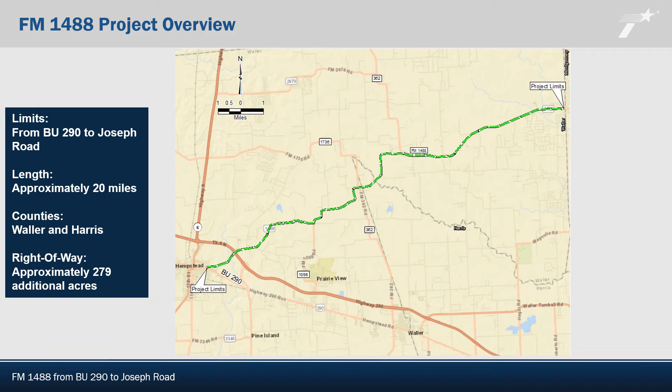The project's limits are from Business 290 in Hempstead to Joseph Road in Waller and Harris counties. Land use in the area is typically agricultural with businesses and residences scattered throughout. From Business 290 to US 290, the land use is more urban and developed with businesses and residences.

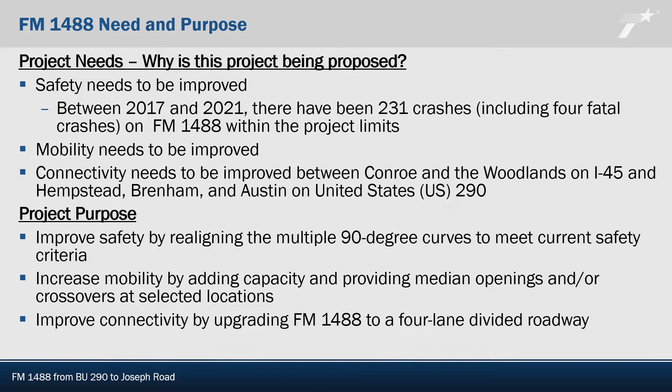The project is being proposed to address safety, mobility, and connectivity. The purpose of the proposed project is to improve safety by realigning the multiple 90-degree curves to meet current safety criteria, increase mobility by adding capacity and providing median openings at selected locations, and improve connectivity by upgrading FM 1488 to a 4-lane divided roadway.

One of the goals for the project is to reduce crashes along the corridor. The project team analyzed crash data for the project corridor for the years 2017 through 2021. Over this 5-year period, there have been 231 crashes, including 4 fatal crashes on FM 1488 within the project limits.

Of the 231 crashes, 76 may have been injury crashes. Additionally, at least 50 of these crashes occurred on sections of FM 1488 that have sharp 90-degree curves, which makes up 22% of the crashes over the 5-year study period.

Also shown on this graph is the statewide average crash rate. In 2021, the statewide average crash rate per 100 million vehicle miles traveled was 115.91, represented by the black line. The orange bars represent the FM 1488 crash rate calculated between the roadways listed above. As you can see, the crash rate along the FM 1488 corridor within the project limits varies from 129 to 237 crashes per 100 million vehicle miles traveled. This results in an average crash rate of 184 crashes per 100 million vehicle miles traveled along the corridor, which is 59% higher than the statewide average for similar roadways.

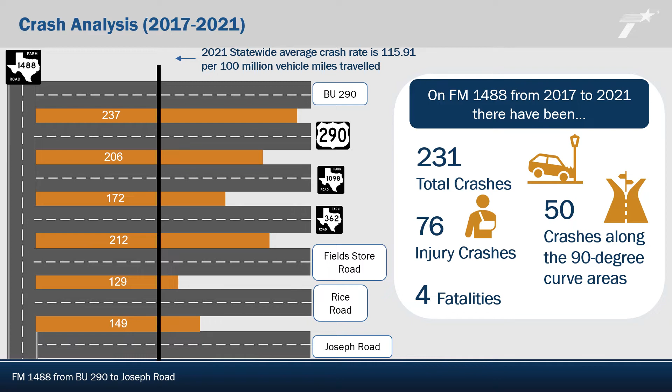Mobility along FM 1488 is reduced due to numerous intersecting roadways and driveways to adjacent properties. Upgrading FM 1488 to a 4-lane divided roadway would add capacity and better accommodate turning vehicles. Median openings at selected locations, and in some areas a center-left turn lane, would be provided to accommodate residents, businesses, and intersecting roads. These would allow east-west traffic to continue driving without having to stop for turning vehicles. The roadway would be designed according to current TxDOT design standards.

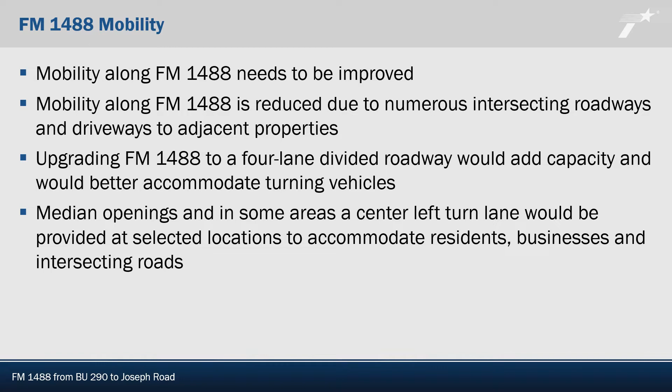Connectivity along FM 1488 needs to be improved. According to the 2017 Waller County Comprehensive Strategic Plan, FM 1488 is one of the top 3 most traveled FM roads, providing a major east-west connection. The proposed project limits are the last remaining segment of FM 1488 to be widened to a 4-lane divided roadway. From I-45 to Spur 149, FM 1488 is a 4-lane divided roadway. From Spur 149 to FM 149, FM 1488 is under construction for widening to a 4-lane divided roadway. From FM 149 to Joseph Road, FM 1488 has been environmentally cleared for widening to a 4-lane divided roadway.

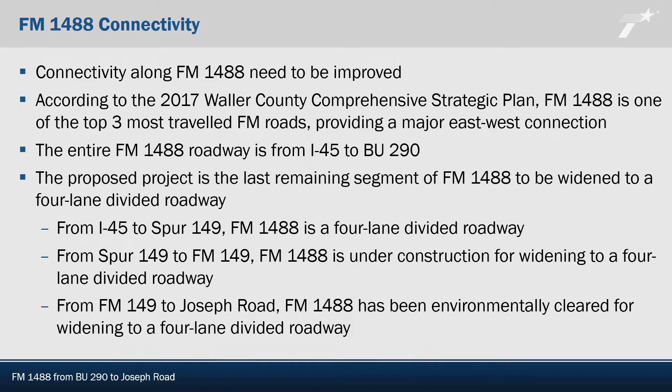This is the second public meeting regarding the proposed widening of FM 1488 between Business 290 and Joseph Road. At the first public meeting in March 2020, 3 general alternatives to widen the roadway and a total of 9 alternatives in the 90-degree curve areas were presented. Following the meeting, the project team refined the alternatives to generate a preferred alternative based on public comment, geometric refinement, safety considerations, and reduction of impacts. The preferred alternative is what is being shown at this public meeting.

Some examples of the alternative refinement can be seen when looking at the curve areas. The preferred alternative in the curve areas is different than what was shown previously, unlike other areas of the corridor where the preferred alternative comes from one of the alternatives presented at the first public meeting. The following 4 slides show examples of the differences between the alternatives shown at the first public meeting and the preferred alternative.

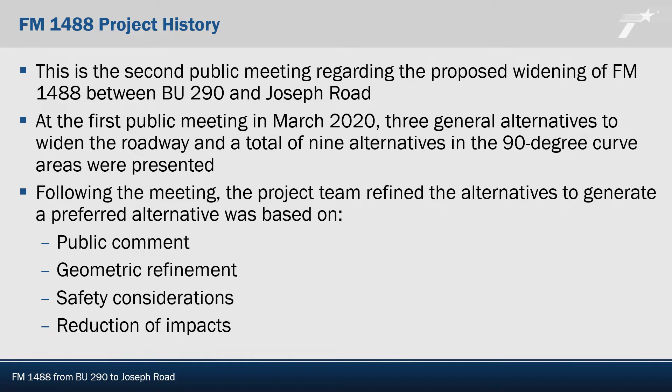The locations of the 3 areas with 90-degree curves along existing FM 1488 can be seen on the map. As discussed on the previous slides, at least 22% of the crashes that occurred along FM 1488 within the project limits occurred on these curves. The project proposes to soften the curves to reduce crashes. The preferred alternative for each of the 90-degree curve areas, as well as the alternative shown at the first public meeting, can be seen in more detail on the following 3 slides.

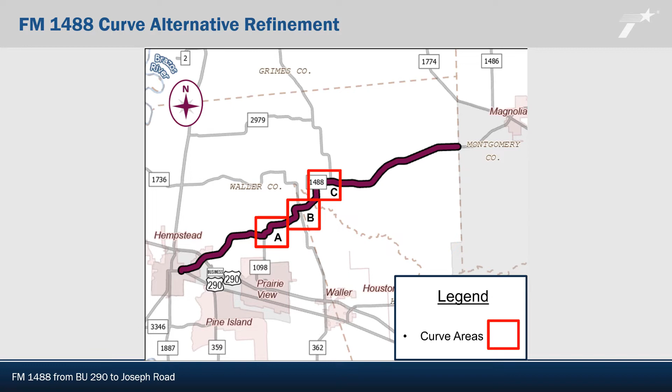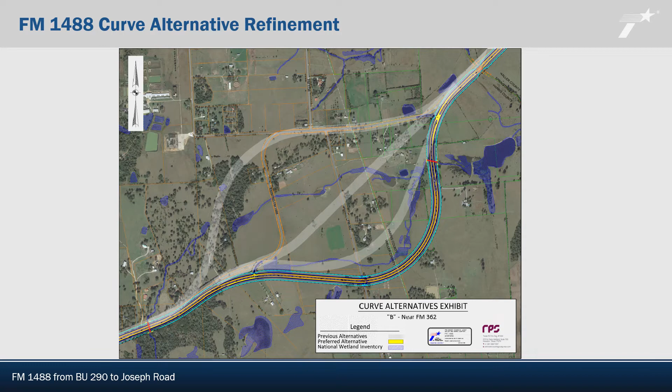This image shows curve area C, located west of Field Store near Field Store Elementary School. As with the previous slide, the gray shaded areas represent alternatives shown at the last public meeting, and the blue outline path highlights the preferred alignment. The preferred alternative does not follow the alternative alignments shown in March of 2020 because in this area, the curve could be smoothed out by making geometric improvements to meet the design requirements, resulting in fewer impacts to property owners.

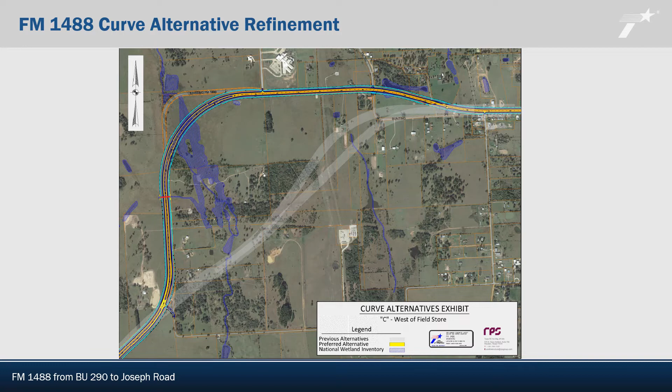In addition to softening the curves, this project proposes to reconstruct and widen the existing 2-lane undivided roadway to a 4-lane divided roadway with median openings at various locations. There are 2 sections of FM 1488 proposed to be reconstructed as a 4-lane roadway divided by a center left turn lane. This configuration is proposed from west of Giboney Road to east of Hegar Road, and from west of Woodway Drive to Joseph Road.

Improvements also include constructing a 10-foot wide side path that accommodates pedestrians and bicyclists between Business 290 and US 290, and constructing a 5-foot wide sidewalk between US 290 and Joseph Road.

The no-build alternative would also be considered. This would mean that no roadway widening would occur and only planned roadway maintenance would take place.

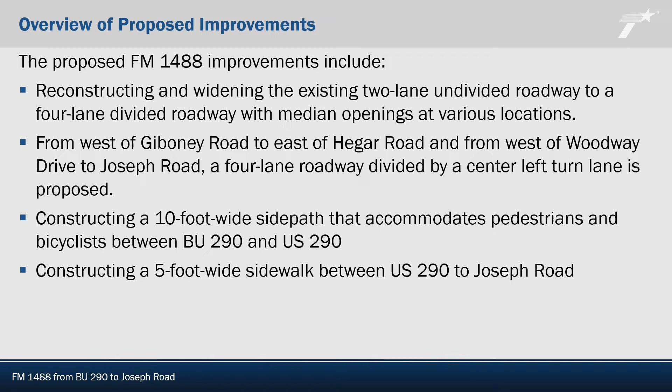Following the first public meeting, a single alternative was not selected. Rather, the preferred alternative for the widening of FM 1488 is the result of a closer investigation of the previous alternatives and a refinement to address public comments on alignment location, improve geometrics and safety, avoid low-lying areas with drainage concerns, and reduce impacts. One example of the alternative refinement was the development of sections where a center left turn lane is proposed.

During the first public meeting, 2 alternative evaluation matrices were shared. One matrix focused on comparing the general widening alternatives: Alternative A, which required right-of-way from the left side of FM 1488; Alternative B, which required right-of-way from both sides; and Alternative C, which required right-of-way from the right side of FM 1488.

The second evaluation matrix focused on evaluating the same criteria but only for the 9 curve alternatives.

The evaluation matrix shown here evaluates the preferred alternative, excluding the curve areas, compared to the general widening alternatives shown at the first public meeting. Although the estimated right-of-way is higher for the general widening of FM 1488, the number of residential, commercial, and other displacements with this alternative is lower than the previously shown alternatives.

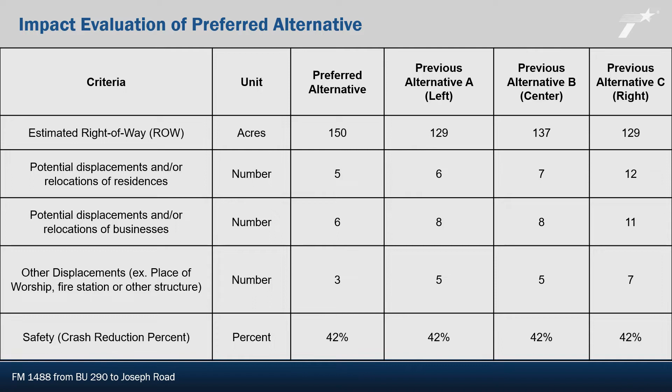In March of 2020, the evaluation matrix comparing the curve areas was separated out in order to provide details for each alternative. The evaluation matrix shown here evaluates the preferred alternative in the curve areas compared to a range of impacts associated with the 9 different curve alternatives.

Typically, each alternative had an estimated right-of-way between 34 and 46 acres. The estimated right-of-way for each curve area is similar to what was estimated for each curve alternative shown previously. However, with the preferred alternative, there are no anticipated residential or commercial displacements and only one potential other displacement.

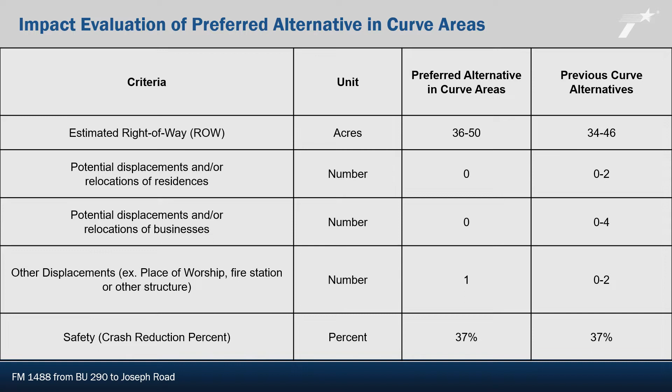This slide shows an existing typical section. A typical section is intended to show a cross-section of the road to illustrate what it looks like at a specific location. As you can see here, FM 1488 currently has one 12-foot wide lane in each direction with an intermittent 12-foot wide center left turn lane.

Shoulder width varies from 4 to 10 feet wide. The existing right-of-way varies from 80 to 100 feet wide.

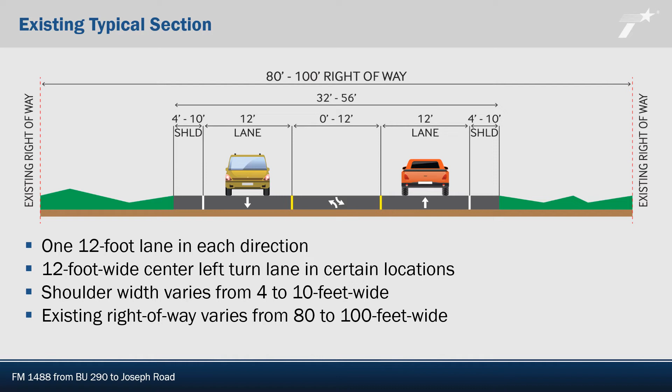Shown here is a typical section illustrating what FM 1488 between Business 290 and US 290 would look like post-construction. The project proposes to add one additional lane in each direction and construct an 18-foot wide raised median. Left turn bays are proposed at certain locations along the corridor, which can be seen on the schematic.

A 10-foot wide side path is proposed for 2-way bicycle and pedestrian use on both sides of FM 1488, separated from traffic by a buffer. The proposed right-of-way would be approximately 120 feet wide.

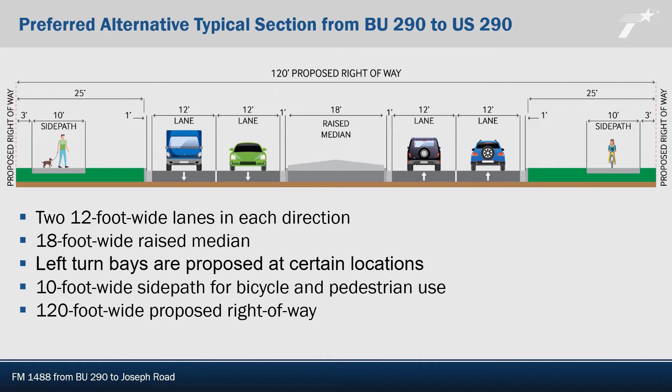This slide illustrates what FM 1488 from US 290 to Joseph Road would look like post-construction. The proposed improvements include adding one additional lane in each direction and constructing a 40-foot depressed grassy median.

A 5-foot wide sidewalk is proposed on each side of FM 1488 for pedestrian use, separated from traffic by a buffer. The 10-foot wide outside shoulders would accommodate bicycles. The proposed right-of-way would vary between 200 and 220 feet wide.

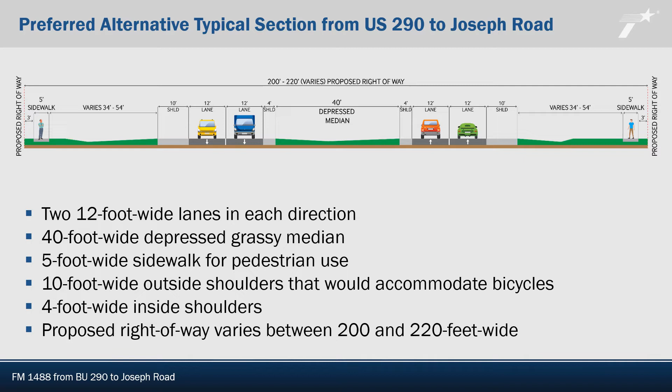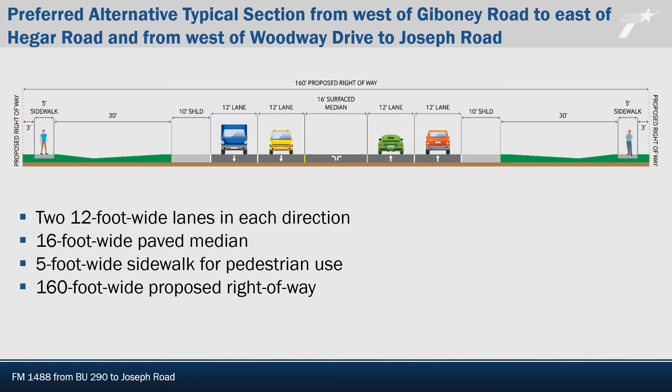Their contact information is given later in the presentation.

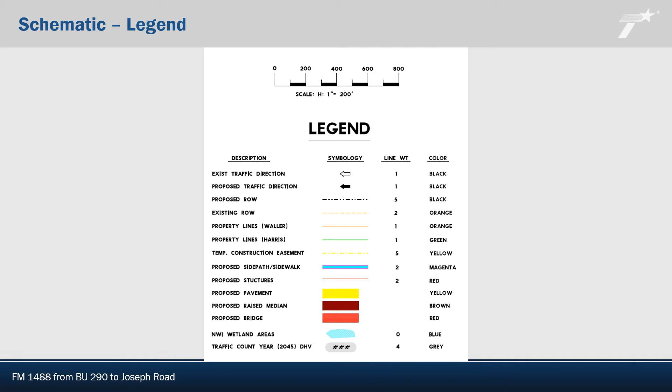Approximately 279 acres of additional right-of-way would be required for the proposed project and would potentially displace 5 residential structures, 6 commercial structures, and 4 structures classified as other.

A structure classified as other is a structure that is a different type than a residential or commercial structure. For this project, the other potential displacements were identified as 3 sheds associated with residential properties and a utility building.

TxDOT offers relocation counseling and financial assistance to residences and businesses that are displaced by the acquisition of highway right-of-way in accordance with the Uniform Relocation Assistance and Real Property Acquisition Policies Act of 1970.

TxDOT would provide assistance to potentially displaced residences and businesses. Information about the TxDOT Relocation Assistance Program concerning services and benefits for displaced persons and businesses can be found on the TxDOT website.

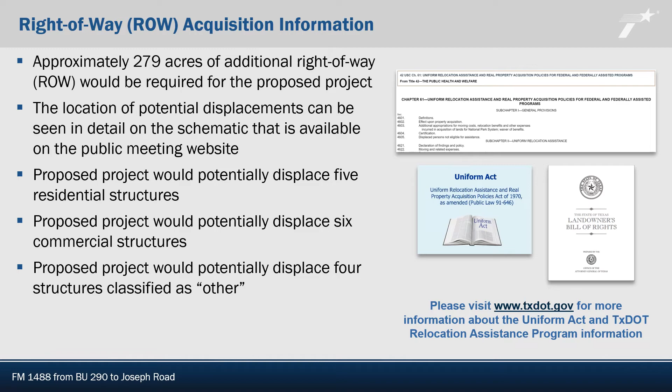Over the next few slides, I will walk through the location of each potential displacement. Feel free to pause the video to study in more detail, or visit the schematic exhibit either online or in person.

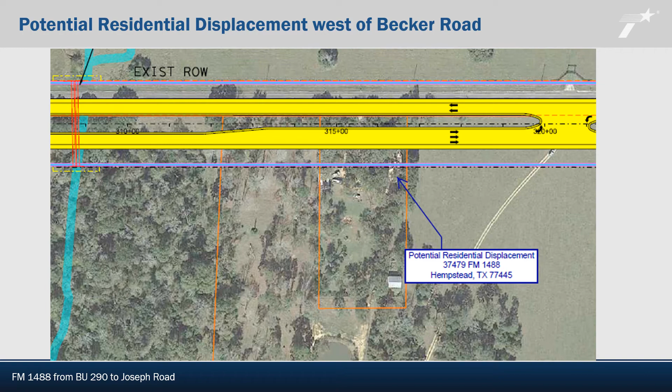A potential residential displacement was identified west of Becker Road, located at 37479 FM 1488, Hempstead, Texas 77445.

A potential other displacement was identified as a shed located west of FM 362 at 34855 FM 1488, Hempstead, Texas 77445.

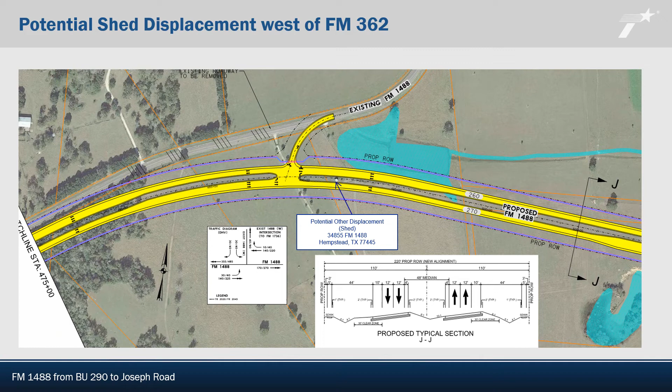2 potential commercial displacements and a potential residential displacement were identified near Fields Store Road. Amsler Real Estate, located at 30717 FM 1488, Waller, Texas 77474, and CCR Buildings, located at 30555 FM 1488, Waller, Texas 77494.

The potential residential displacement is located at 30439 FM 1488, Waller, Texas 77484.

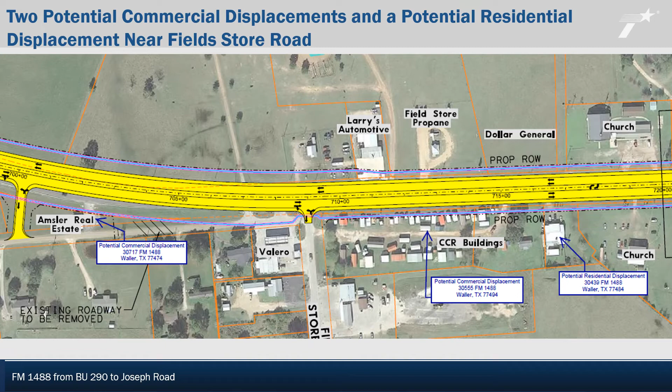Two potential commercial displacements were identified near Hegar Road. Bill's Tire Company, located at 29454 FM 1488, Waller, Texas 77484, and Shell, located at 29503 FM 1488, Waller, Texas 77484.

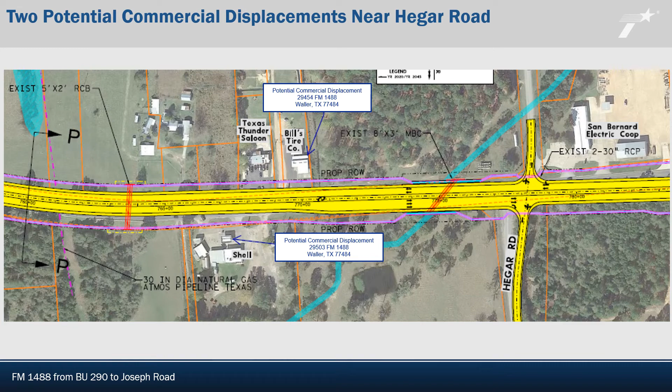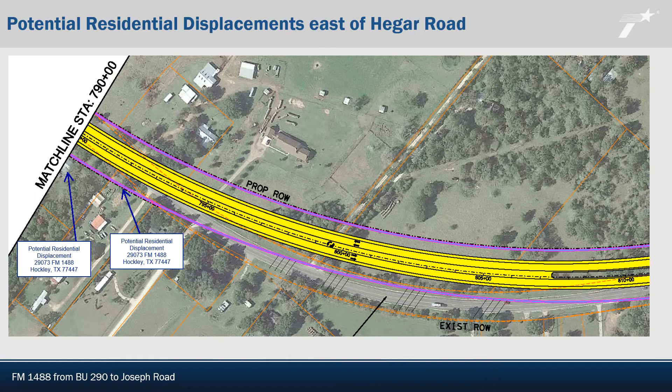A potential other displacement was identified as a shed west of Sheffield Road, located at 28206 FM 1488, Hockley, Texas 77447.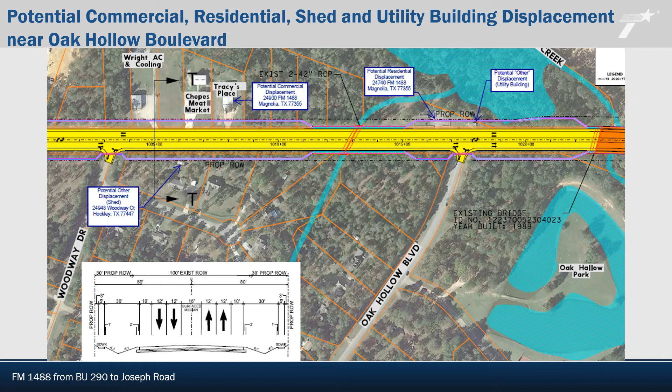A potential commercial displacement was identified east of Oak Hollow Boulevard, located at 24421 FM 1488, Magnolia, Texas 77355.

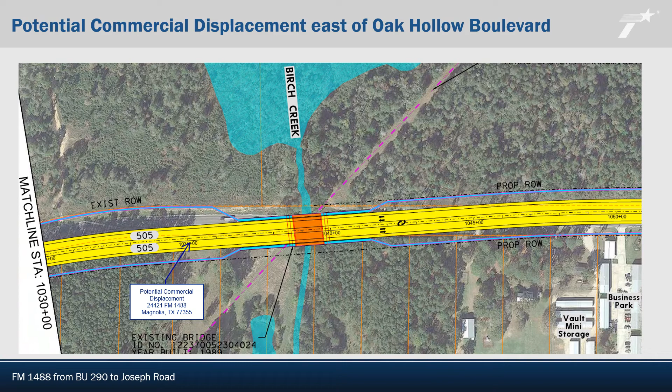The project team is in the process of identifying and evaluating other potential environmental impacts that could occur as a result of constructing the proposed improvements. Areas being reviewed include cultural and natural resources, community impacts, environmental justice, floodplains, floodways, and hazardous materials.

A traffic noise analysis will be conducted in accordance with state and federal guidelines to determine if the project would result in a traffic noise impact. If there is a traffic noise impact, noise barriers would be analyzed to determine if they are reasonable and feasible. If noise barriers are proposed for the project, a noise workshop would be held for property owners adjacent to any proposed noise barriers. The project would be designed to avoid or minimize impacts to the greatest amount practicable. Technical reports documenting the analysis and conclusions of these studies will be available for review once completed.

The proposed project is consistent with the Houston-Galveston Area Council's 2045 Regional Transportation Plan for the Houston-Galveston region. The proposed project would be funded with a combination of federal and state funds for a total of approximately $202 million.

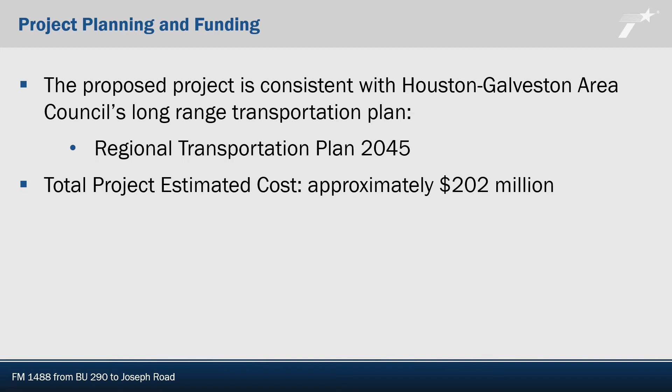We want to highlight the estimated project timeline. Look for the green 'We Are Here' arrow. This public meeting is being held to present the preferred alternative for public input. After the comment period closes, TxDOT will consider all comments received and prepare a public meeting summary report with a response to each. The summary report will be posted to the project website approximately 3 months after the close of the comment period. The next steps include development of the environmental documents and the detailed schematic design.

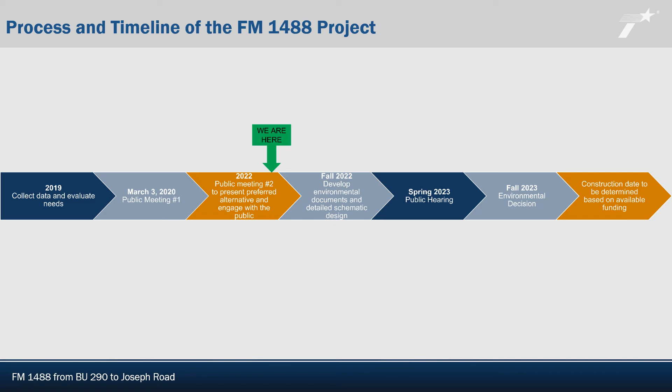Once the environmental analysis is complete and the design is further refined, a public hearing will be held to present the design and completed environmental documents to the public. Following the public hearing, and after the project team has considered all comments received, an environmental decision would be requested. Provided the environmental documents and process are approved, the project would then move into detailed design and right-of-way acquisition could begin. The construction date would be determined after funding has been identified.

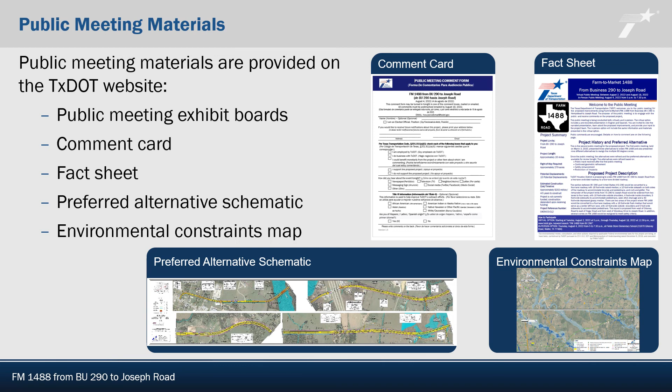The project website contains all materials presented in this public meeting, including this presentation in both English and Spanish, exhibit boards, a comment card, a project fact sheet, schematic layouts for the preferred alternative, and the environmental constraints map. These files are large and may require more time to download than the other project materials.

TxDOT encourages you to review the materials posted on the public meeting website and to provide written comments. You may also submit written comments by using the comment card found on the project's webpage in the Downloads section. The comment card can be emailed to hou-pio webmail at TxDOT.gov or mailed to the TxDOT Houston District, Attention Advanced Project Development Director, P.O. Box 1386, Houston, Texas 77251-1386. Comments must be submitted by email or mailed and postmarked by Friday, August 19, 2022, to be included in the official public meeting documentation.

Responses to comments received during the comment period will be included in the public meeting documentation that will be posted on the project webpage in approximately 3 months. The project webpage is www.TxDOT.gov, keyword search FM 1488 from BU 290.